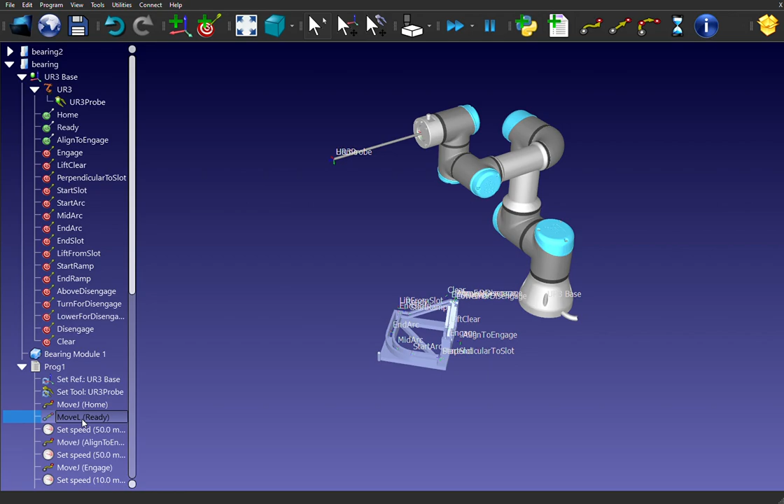So we start out at the home position where the robot is oriented as shown. Next, we move to the ready position, which, if we zoom in, we see is here above the bearing. After moving to the ready position, we have a joint motion to the align to engage. From this point, we engage the bearing,

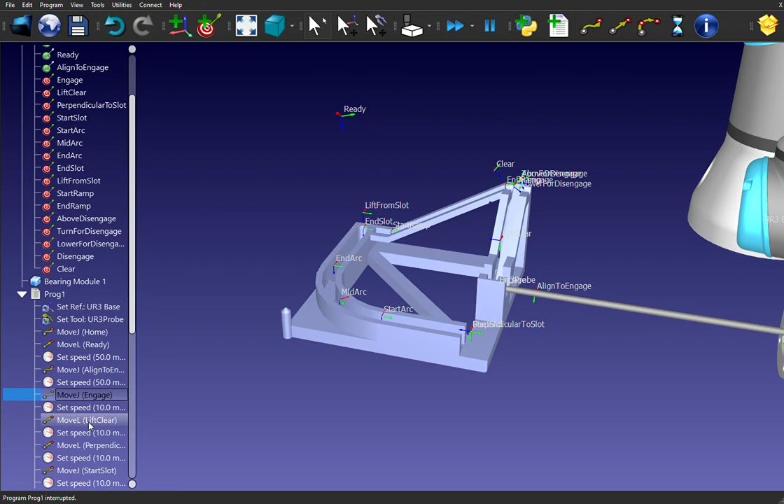lift it clear, and move perpendicular to the first slot. Next, we align the bearing so that it can travel along the slot. We have a linear motion up to the start of the arc, and the arc is defined by 3 points, which are added as the last two are mid-arc and end-arc.

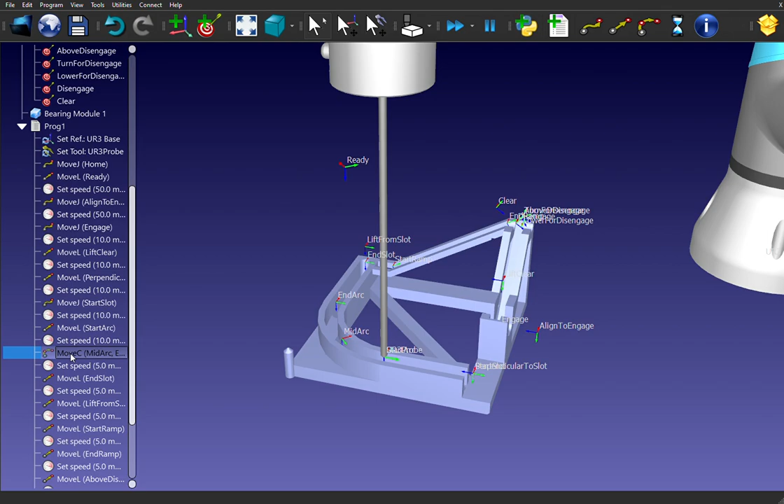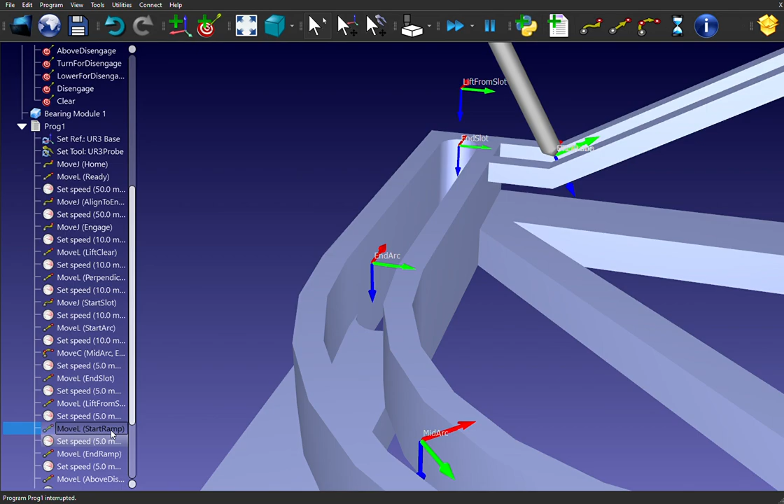We can see it travel, and by the way, throughout this whole slot, positioning in the middle of the two faces. We then have a linear motion to the end of the slot and lift away for clearance. We then have a linear motion to the start of the ramp, a linear motion up the ramp, and we begin to get ready to disengage the bearing from the tool.

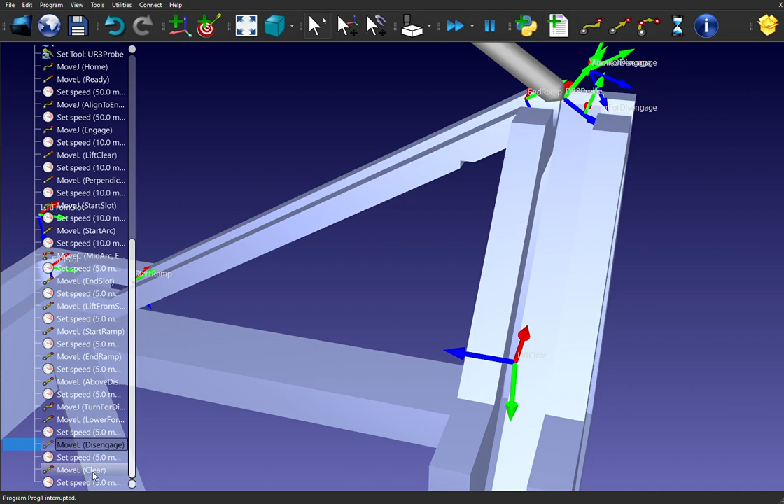So first we move above this disengage area. Had to force a joint motion here to get the right orientation due to joint limits. We then lower and move away to disengage. At this point, hopefully the bearing comes off, and finish by clearing away from the ramps. We then return to the home position.

So if we wanted to see this all play out, we could run the program and display the path. So as you can see, these large loops, where often the robot is intersecting itself, are the joint motions, and they are workarounds that allow me to run the rest of the program, and hopefully I will learn how to properly define my targets to avoid this in the future.

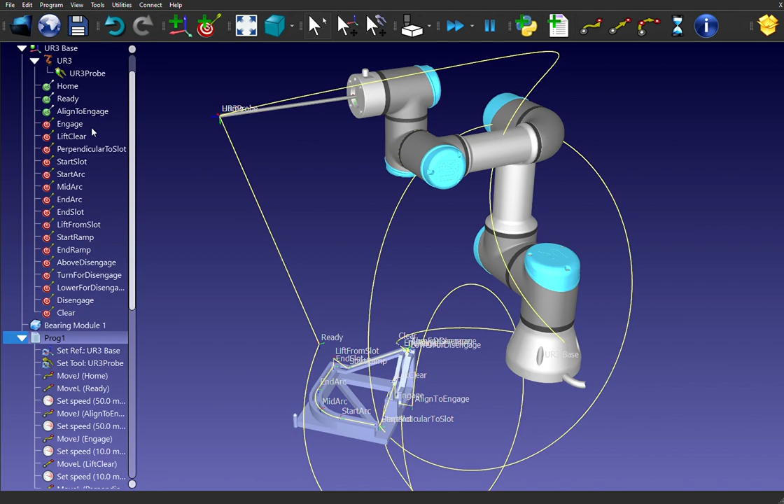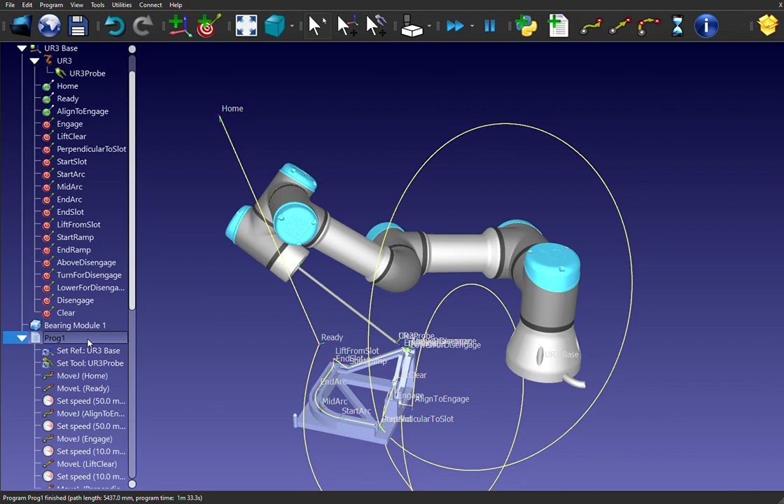So running the program, go to ready, engage, go along the slot, including the circular arc, lift away from the slot, engage the ramp, move up the ramp, and it's time to get that bearing off, so we lift ourselves away from it. If we wanted to play it in a loop, you can do so by selecting loop and running.

Here I had it slowed down because I was really trying to change the configuration of the robot to different angles, but even when I forced it and tried to define the targets by joint angles, as seen by the green targets on the tree on the left, they were not sticking. So here we're getting to disengage, and it starts to loop again. But I'll go ahead and stop it.

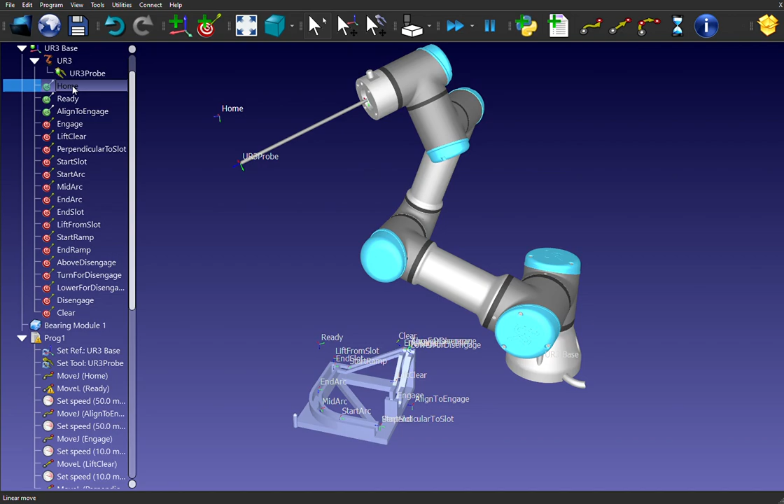Now, here the issue is that when the program is running the home position, it's in this orientation. This is different than the home orientation that I defined, and I'm not exactly sure why it's doing that. Because if we had started from that home position, maybe this ready position might have had a more promising condition.

As you can see here, these joints are almost aligned, which could be part of the reason that we couldn't do a linear motion to get ready to engage the bearing. We might be approaching a singularity here. I tried manipulating the joint angles myself, and if instead of having this upward facing angle, we had a downward facing angle of those two links, then it would have been more possible to smoothly move into the engage position.

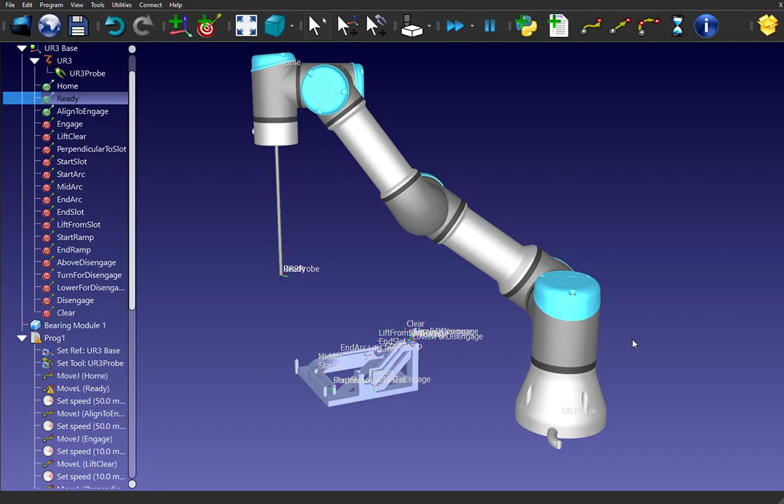Again, I tried to force those joint angles on the configuration of the ready, but my selections don't stick, and I'm not sure why. So as you see here, aligning to engage, we had to do a joint angle to that, even though I tried defining the angles. And after that, these targets are just coordinate based rather than joint angle based.

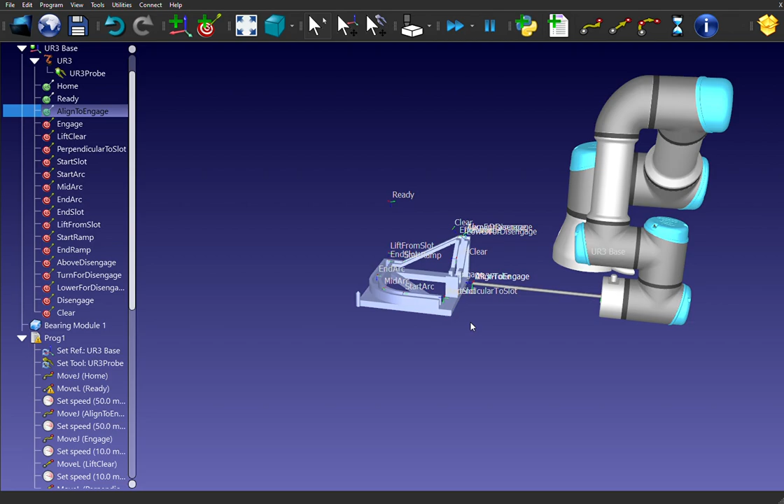So this is my submission, complete with an explanation of the errors, and that completes my presentation.